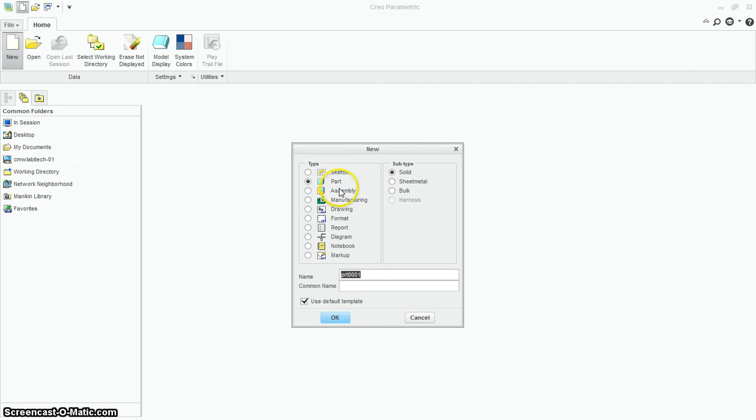Okay, so we're going to go ahead and assemble the bottle and the cap for the last tutorial on the sports bottle. We've already set our working directory, and we're going to click New. Now you got to be careful, we're not going to make another part, we're actually going to make an assembly because we're going to take the bottle part and the cap part and put them together. So this will be called bottle, or sports bottle, or whatever you want to call it, and click OK.

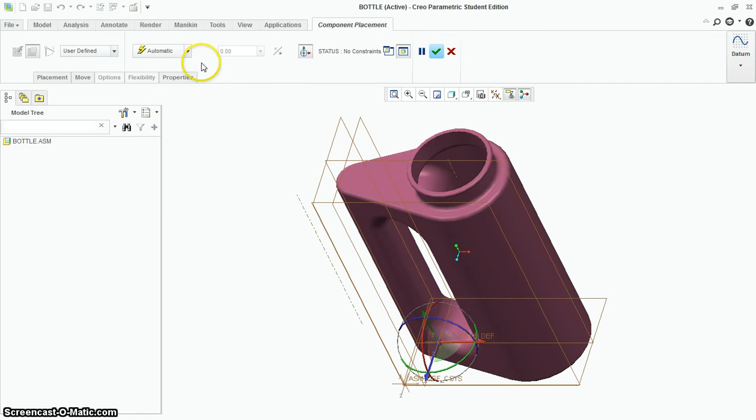We don't go up and click extrude or revolve or anything like that. We're actually putting things together. So we go to assemble. You always start with the main part, in this case the bottle. Once you've opened the bottle up, we're going to go ahead and make this default. This is going to lock it to XYZ. This is important that you lock this to the default so that it's stable, and go ahead and green check mark. So there it is.

And then we're going to add one more part, and we're going to be done here. I'll show you what you need to look for to make sure everything's perfect. So we're going to go to Assemble. We're going to find your cap, click it, open it, and don't worry about where it comes in. It doesn't matter where it's at, because we're going to use constraints to actually tell it how we want to put it together.

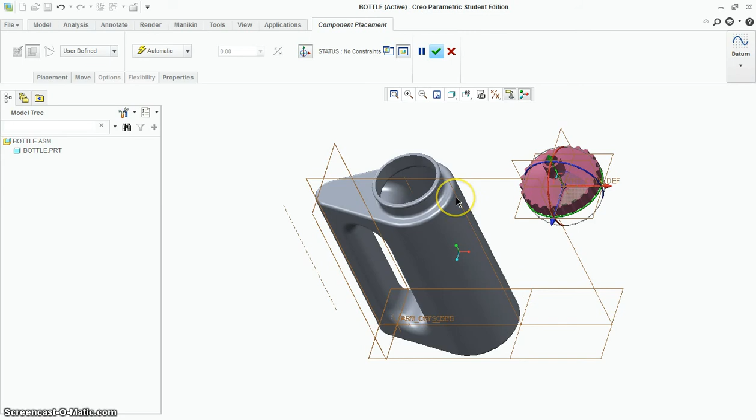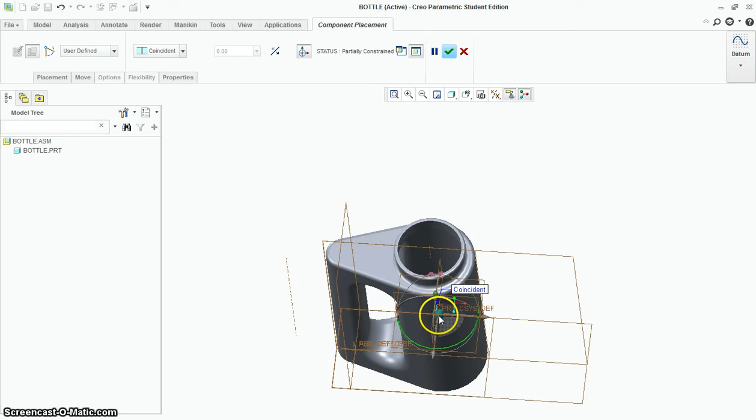Now, if you do rounded to rounded, there's a good chance that it'll fly inside the bottle. That's okay, so let's do that and see if it'll happen for us. So we're going to go rounded spout to rounded spout here, and you can see, yeah, it's inside the bottle, so it's buried inside of there. It's like, I did it. Well, it did, but it also put it in an awkward position. So if you want to grab that little ball right there and pull this out of here, you kind of need to be able to see the bottom surface of this.

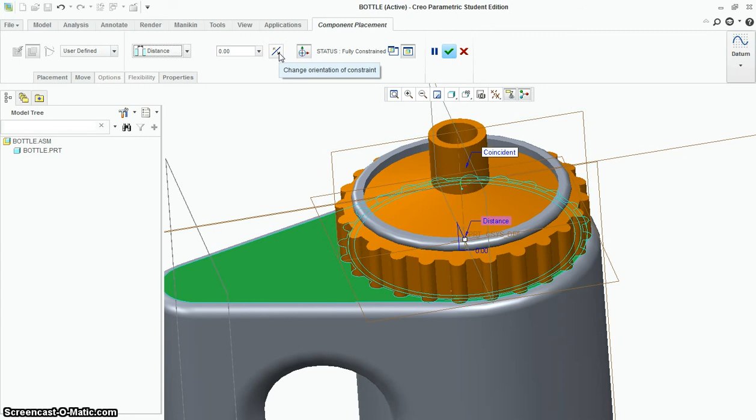So the first constraint is good. The second constraint is that the bottom of this cap, so we're going to click that, is actually going to almost touch the top of the bottle itself. Now you can see that's too far down, so what the directions say is go ahead, now that those two surfaces are aligned, go ahead and build in a distance between those. The other thing to note here is if your cap is faced the wrong direction, you can actually flip the direction with this flip button right here.

So we're going to build in a little distance. We're going to pull this up and go 5.5. When you do that, it's good. Okay, we're actually done with our bottle. I want to show you how to check it and make sure everything's good.

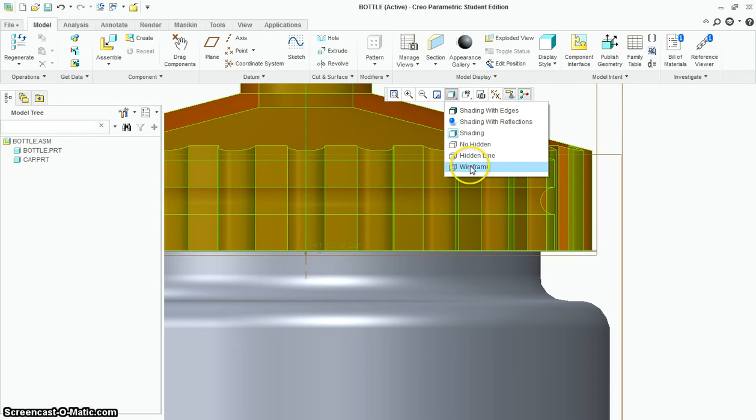If you go back to front view and you're looking straight on at front view, what I want you to look for is this. Go to your wireframe view, and we want to look at how the lip on the actual bottle fits with the lip on the cap, and we're looking that they're equal in size and that the lip on the cap actually snaps right over the lip on the bottle, and that's perfect. They're not overlapping each other, there's not a big gap between them, and they're the same size.

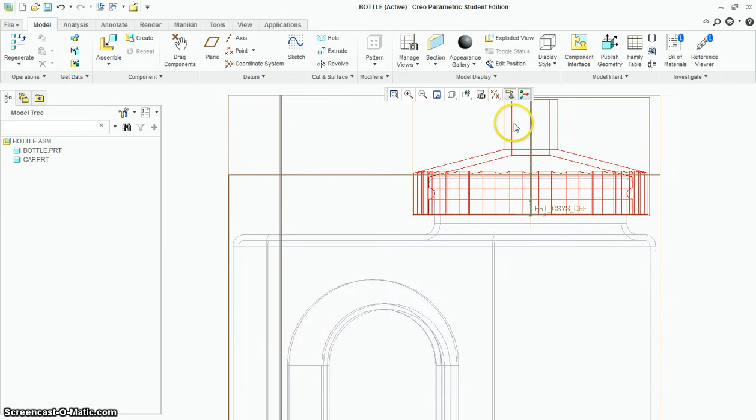So this would be 100%. All the dimensions on the cap are right, all the dimensions on the bottle are right, so you're good to go. You can almost grade yourself here just to make sure that everything is right. And this is the end of this tutorial. Make sure you save this before you get a grade on it, and it'll save as what you called it and where you put it. And that ends the sports bottle.